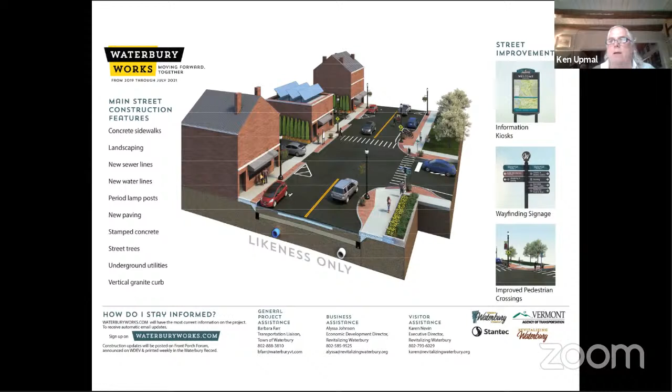There we go. So now, Liz, there was that other picture I had. Let me just... it's gonna take a moment, unless you can share it yourself, but I will look for it. Yeah, it was just gonna take a minute. Waterbury Map General. Yep, it's gonna take a minute for me to find it. Do you not have it? Can you share it? I have it. Let me see, how do I share my screen here? Just click share screen, and I'll look for it in the meantime. Okay, share screen. Yeah. Just click share screen. Yeah. Now I gotta find it. Apologies, I gotta find it. Yeah I'll look too.

How'd you ever manage a project like that with all the traffic going through town? I mean, I just can't imagine tearing up the whole street.

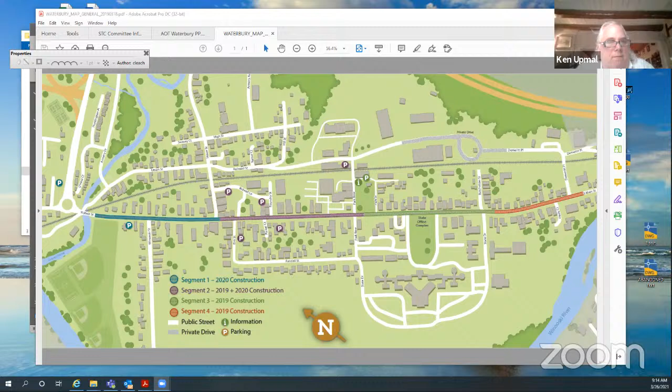Wow, there we go. Okay, so on the far left there of that illustration, you can see the circle, that's the roundabout off the interchange. Okay, and the project starts just beyond the brook, that little bridge on the right side right there, and it extends easterly, and right there you'll see it goes all the way down to a point, just past the old Bean Chevrolet place. You can see the Waterbury State Office complex loop there as such.

Got a few things. One of the challenges of this project, of course, the real challenge to these projects I've always said, is not the engineering. Engineers, we don't have a hard time doing our work with respect to the engineering, but it's always the right of way and the utility and the environmental permits. I find those to be our greatest challenges.

And just for this project, as a side note, it had 122 separate parcels. Oh my God, so it was the largest right-of-way undertaking that I've ever experienced at the agency. And so we had to meet with every one of those abutters and discuss the project with them, listen to their needs and concerns, and incorporate that. And then we had to value all those, and then we had to negotiate settlements with all those. And we did a pretty good job there because we only had one individual challenge us on minor alterations.

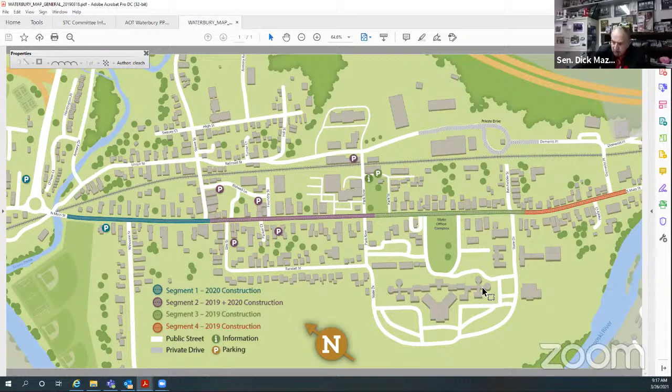Well, as I said, we have undergrounded all the utilities. We've built the infrastructure underground for all the utilities from the beginning of the project to that northern access to the state office complex. And it was eligible for federal participation, so the town only pays 2% of that.

But here was the trick, and this was one of our greatest challenges. From a constructability standpoint, you could have put all the infrastructure underground, but then it takes about 1.5 years or even more for all the utilities to run their stuff underground. We don't physically move their infrastructure from the poles to the underground utility conduits and vaults - that's their work. And of course, you'd have them tripping over the contractor, which would be a real mess. It was a real challenge.

So what we came up with after about 1.5 years of discussions was that the existing poles were in a position such that we could leave them throughout the primary reconstruction of the roadway and the sidewalks. And then we build all the underground infrastructure to host those utilities.

And now that the vaults are in, I think Green Mountain Power has moved most of their power underground, but now we have 4 or 5 other telecommunications utilities that need to move their work, and most importantly, Fairpoint, who would be the last people to move their stuff underground and then connect it and energize it all. So that's being done now as we speak.

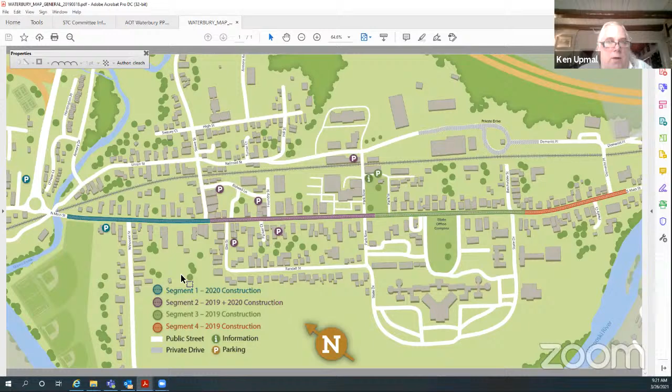And then it gets programmed and it gets deemed eligible. And that's what we've got - we've got these legacy projects that have been around in the roadway group, and we've knocked out a whole bunch of them. I've got 4 more or 5 more to complete. I'm not going to get them done in my career because I'm going to retire soon, but when they're done, the agency doesn't have a whole basket more of these to do.

There'll probably be some corridor programming. I know there's interest in certain corridors on the national highway system, but this was all done back in the 80s when they programmed this stuff, and it takes a lot of money, a lot of effort, and a lot of time. They're not something you can knock out like we do in our accelerated bridge program. The logistics of advancing a project with the utilities right of way and environmental permitting is quite a massive undertaking. Kind of makes you wonder where sometimes we get the payback on some of these projects.

It's not that the infrastructure doesn't need upgrades, and we need to modernize. But when you hear about how retail is dead and everybody wants to move out, I wonder if we keep up with the times on some of these. What was good in the 80s sometimes isn't good in the late 2000s, but it's a beautiful project, no ifs, ands, or buts. It's just a stunning project. I guess that's what it is - it keeps Vermont looking more like Vermont.

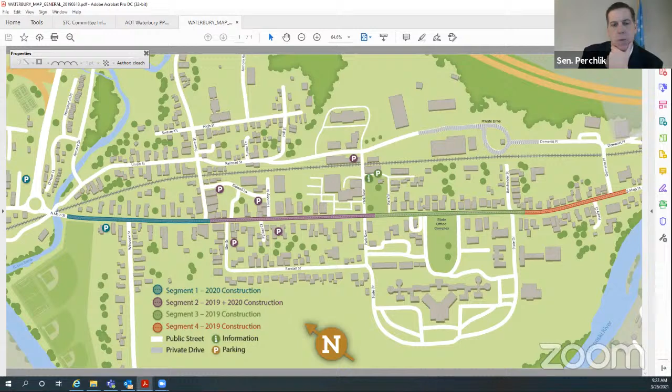No. What happens with the sewer - I work with Federal Highway Administration, and typically because of the proximity of the existing infrastructure to the bottom of excavation, if it's close enough, your construction activities will damage it, so that makes it eligible for participation. I worked with Federal Highway and got them to go along - I think we had 65% of it that was close enough. Instead of making the town pay for the other 35%, Federal Highway came in and decided to participate in the whole thing. That's an issue with a project in Plainfield on the intersection there.

Fortunately, it might create another stoplight for Senator Kitchel to go through on her way to Montpelier, but the cost of the sewer lines and water lines to the town is pretty astronomical. It seems like some of these projects get federal funding and some don't, so I'm trying to better understand when that is.

I'd have to know more of the details. All projects are different.

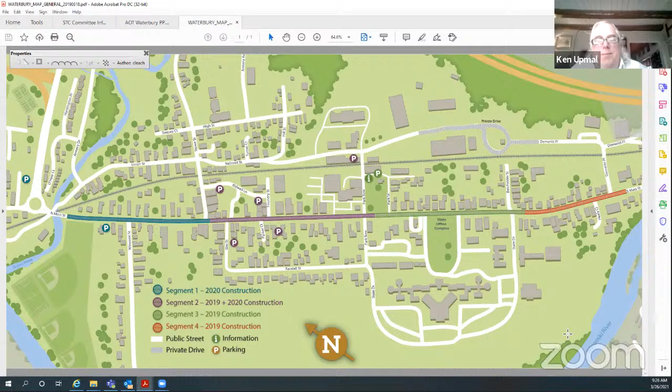One of our greatest challenges - we would have built this project a year earlier, we were ready to advertise, but we had to deal with all the development soil issues from new laws related to those. Development soils being those soils in urban municipal environments that have the potential for solid waste contamination. The soils were the town's, and it would have cost them probably millions of dollars to dispose of that soil under the new guidelines and requirements.

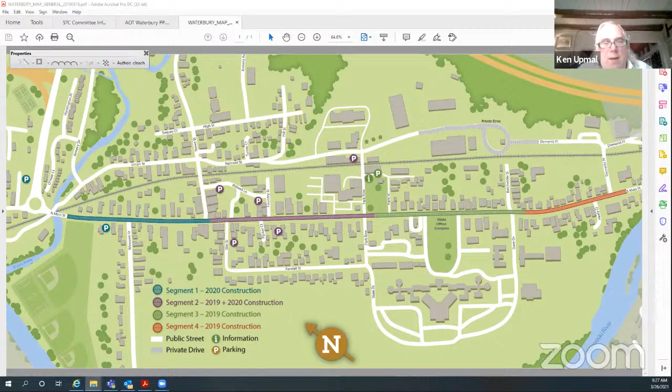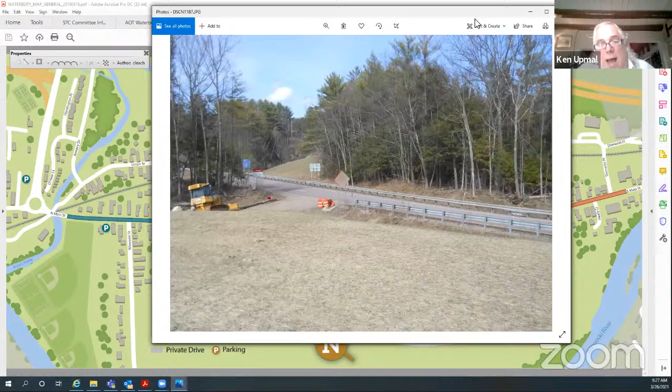So we came up with another innovative approach and bypassed the need to go through that whole process by wasting those soils within the interstate right-of-way. If you drive around Waterbury, between Burlington and Montpelier, Casey's going to show you some photographs - we placed those materials in two or three separate areas within the interstate right-of-way to accommodate those soils. The town of Waterbury didn't have $3 or $4 million to get rid of that soil, but we were allowed to put it within our right-of-way because it's not going to be developed.

So that was really interesting. Like I said, this has been a really incredible undertaking.

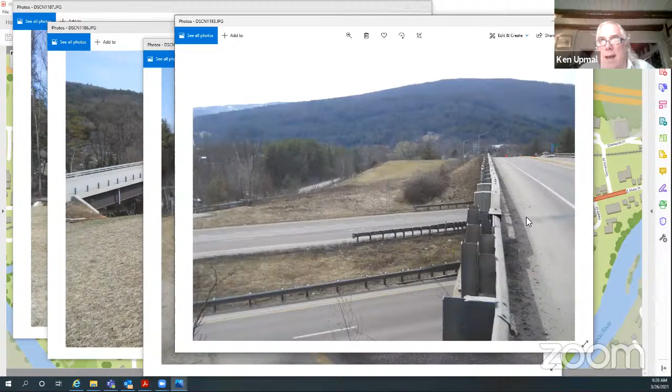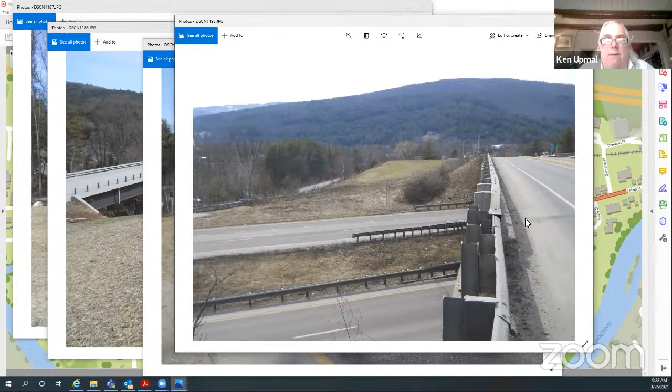I'm going to let Casey show you some photos, but before I close out, I got to give credit to people that never get much credit. There's a gentleman who works for the Agency of Transportation, Tom Mancini, the resident engineer on this job. This guy goes out there and builds a project like this day in, day out, 14-hour days. It's incredible the commitment they have. Casey Leach, who's going to speak to you, went out there and acted as assistant resident, working hundreds and hundreds of hours over 2 years. And I got to give credit to J.A. McDonald and their superintendent, Matt Moran, for dealing with the logistics of getting this project constructed - it's amazing. So I just wanted to give a little credit to those folks, because they never get much credit and they do an outstanding job.

So with that, Casey, why don't you introduce yourself and give the folks a little construction update.

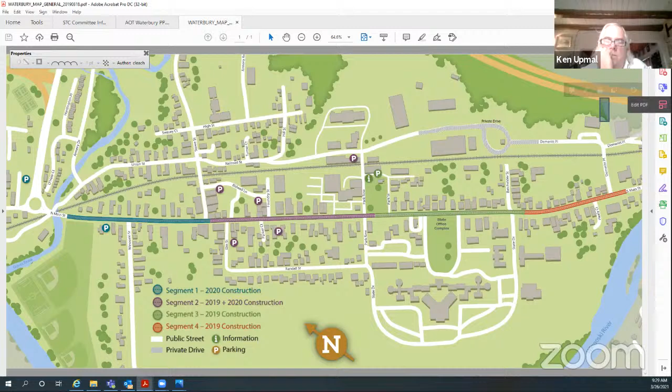Hi, Senators, thank you for having us here. So like Kenny said, I was lucky enough to work in the field for the past 2 construction seasons on this project. I worked a little bit with him and Stantec developing the final phase of the contract plans and going through the advertisement process, so luckily I was familiar with it beforehand.

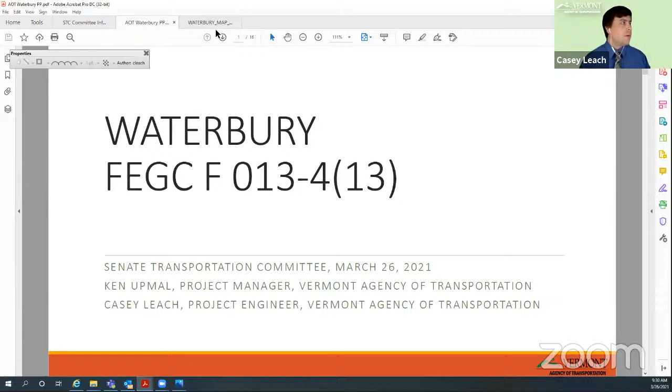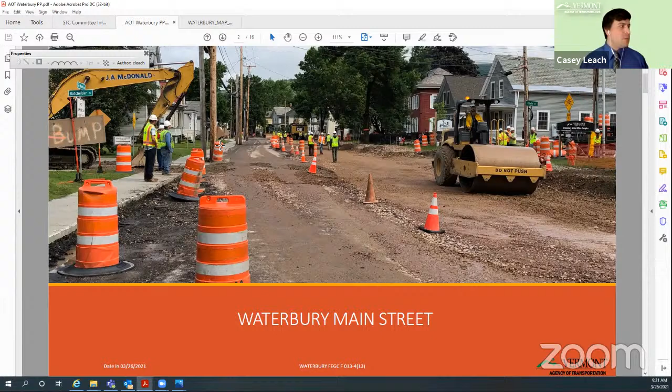Good eye there. And as Kenny mentioned before, this shows the utility poles - the older ones are still there, as well as the newer ones. In this area, these poles are staying. The lighter brown are the newer ones where most of the utilities had already switched over to, and the darker gray ones we removed when we did the reconstruction of the sidewalk through this area.

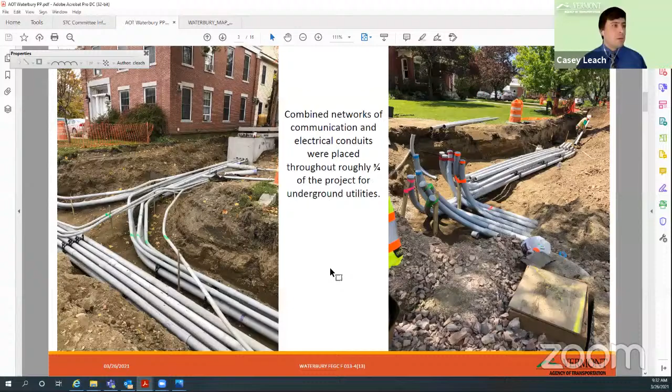Boy, talk about coordinating things. Oh my God, I can't even imagine sitting down and figuring this all out. Yeah, the conduit was probably one of the trickier things to work through, especially in areas with light pole foundations or busy intersections where there's just a bunch of stuff going on. We had to do quite a few field changes just to make everything work. But luckily, like Kenny said, McDonald was really good and on top of it. You get it all filled up and buried and you forgot to put one in - hopefully not, knock on wood. Oh my God.

Luckily, part of it is they run the strings through for the actual utilities before they progress too far. So not that it didn't happen, but luckily we caught any errors before they were in concrete.

These are just some more riser poles for the conduit. This is right where the conduit would start coming up. You can see these metal sleeves here, so these would all bend here and then come up the pole, and then they would start heading down toward Waitsfield.

You can see some of the issues we had with driveways, because we have to maintain access to driveways that only have one entry or exit point. So between digging the conduit trench, laying the conduit, and then these are all concrete encased, you have to encase them in concrete and then let the concrete set before you can backfill.

So that takes a while. Were all the businesses shut down during that time? The businesses on Main Street, were they able to stay open? They were able to stay open mostly.

If they were open, we made accommodations either with ramps or temporary walkways to make sure pedestrians could get in. Some of them that only have limited access might have changed their hours a little bit. And as terrible as COVID was, a lot of businesses had reduced activity because the state office complex wasn't really at capacity, so there was a lot of downtime with the businesses.

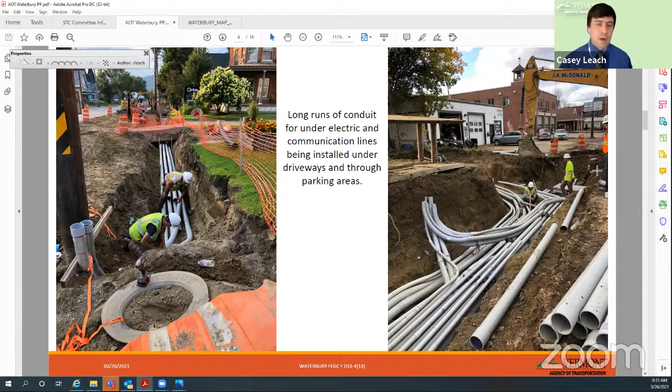People with large driveways or turnarounds like this garage here, or the fire department, were a great example, because we can't dig a large trench across the entirety of the fire department. You just have to do that in phases, so you have to phase everything out.

This was primarily what the contractor submitted for their traffic control plan. We had a lot of stipulations in our contract plans about when they could do lane closures and for how long. One stipulation was they could only do one lane closures from like 9 to 3, because we didn't want to jam up school buses or the state office complex, which is a huge generator of traffic. So during those busy times before 9 and after 3, we wanted two lanes open at all times for more free movement.

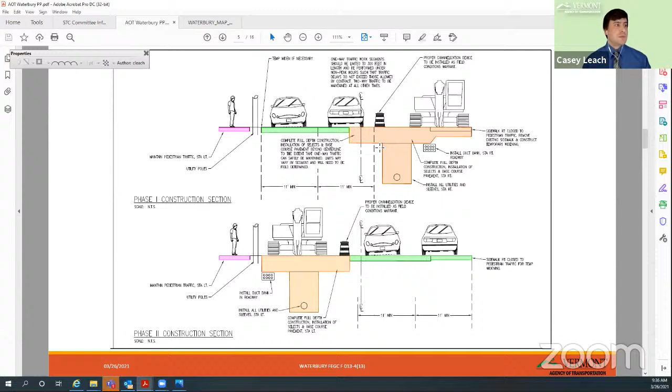The top one was primarily our sewer, on the right-hand side of the road, and the bottom one was mostly the water on the left. We maintained two-way traffic, and they could just move the barrels since we typically used barrels or movable barricades during daytime hours. If we had to, we'd put concrete barriers up at night. But the goal was to have everything backfilled by the evening, primarily by 3 p.m., so we could have two-way traffic moving freely without concrete barricades throughout the entirety of the project.

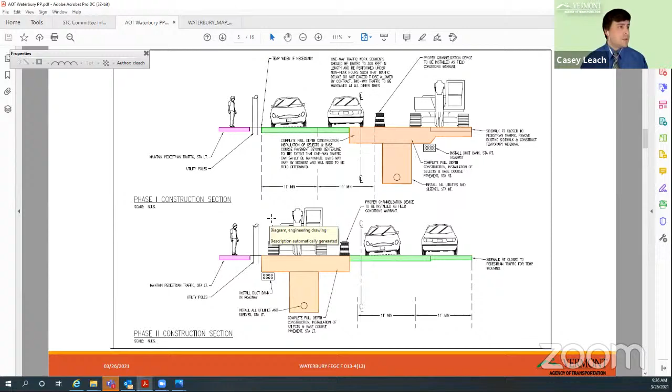These just show some innovative traffic control. When we got down toward the roundabout, luckily that work was the second year, so we were able to really get a rhythm going and know what we were doing. That's one of the reasons McDonald planned their traffic control and work sequencing that way - they didn't want to start in what they called phase 1 or 2, primarily the downtown corridor, because it would be so busy.

With the roundabout, we did require a separate traffic control plan. They had flaggers on every leg to prevent gridlock from happening.

The picture on the left is just a water line install - this is the new water main going in. You can see traffic moving on an alternating one-way basis, and this van is actually part of the live lane of traffic. The dump trucks would park next to the trench to take all the backfill and bring it back when filling the trench, and of course the equipment is above the water line.

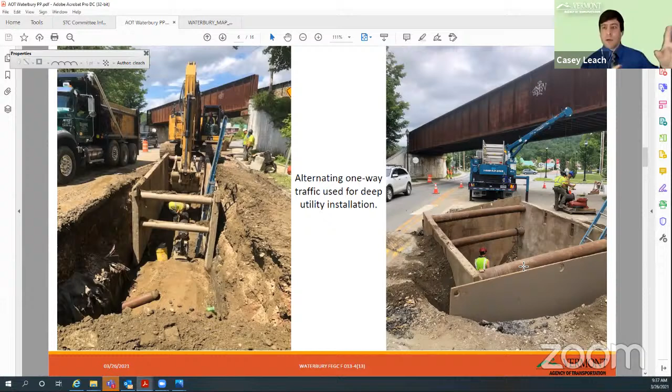The one on the right is a live tap. When we got to the live water main we were tying into on both ends of the project, and some of the intersections, they used live taps so we didn't have to shut down large portions of the water system for an entire day.

These really show the proximity of what we were doing to these businesses. This is a really deep sewer install, and we were right at the entrance of VSECU, Northfield Savings Bank, and Prohibition Pig is right on this side as well. VSECU did close down temporarily for a few days, because you can see it's very difficult to get people in and out of there safely.

We were lucky enough to have separate entrances down on this left-hand picture. McGillicuddy's had a second door here, and this walkway goes to a stairway that empties out onto Elm Street, so we were able to maintain traffic through there. We also used pedestrian flaggers - this is one of them right here. Their job was to move pedestrians throughout the work zone. They would be in hard hats and safety vests with all the safety precautions, keeping watch.

Casey, is the light still there where Stowe Street comes onto Main Street? This light? Yes, the new lights are in, so there's a new traffic signal there. Oh okay, so that's still lighted. It's still a signalized intersection. They don't have the span wires anymore - it's their actual mast poles now, so they look a lot better, I think. But yes, this one is still signalized, and down at the next intersection too, not Elm Street, not Randall Street either, by the state office complex - that one is still signalized as well, a 4-way signalized intersection.

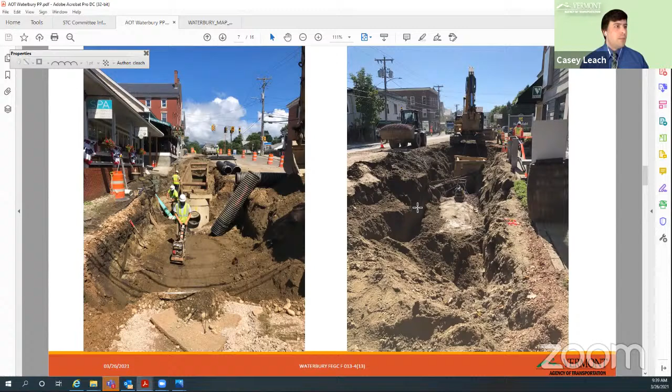I should tell the committee I worked at the state complex from 1978 to 2002, so I spent a lot of time in downtown Waterbury. Must have been 12 years old then. Wow, I must have been, but let me tell you, the village of Waterbury compared to the late 70s is just a beautiful village now, and the houses are in much better condition, and the commercial district too. It's been an interesting evolution to see, but that's a lot of time - and that was back when the complex was not what it is today. So it's pretty transformative.

We did do a lot of work very close to buildings. As you can see here, this is the funeral home right on Foundry Street. We're doing a water investigation right at McGillicuddy's - we had a leak somewhere, so they were receiving water in their basement, and we were trying to figure out if it was an old corporation stop. Typically what the town would do when they switched services was just crimp the copper - they wouldn't necessarily shut off the corporation because then you'd have to dig to the main. There were a lot of interesting live water services that were unknown when we were digging, which made it interesting. But they actually had customers here eating out there, and they were very fascinated with the work we were doing.

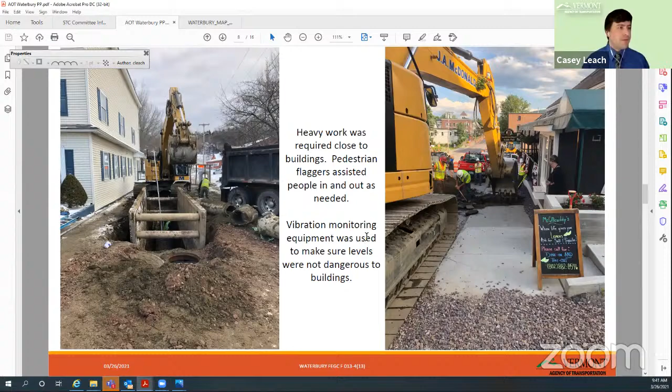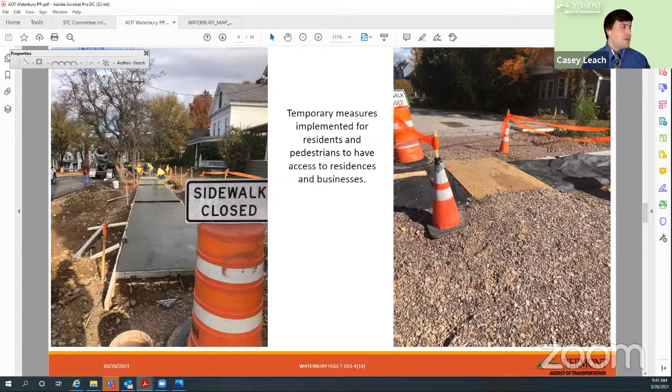These are some of the ramps we kept so people could access their driveways - obviously it was just a walk-on, and they had to park either at their neighbors' or over at the town office complex. We worked with the town really closely, having meetings with them every week with our public information officer and the town public works director, so they worked very well to get the word out and let people know when we would be impacting their driveways or water service. Especially for the driveways, it was a great sense of community, because they would let their neighbors park with them, or work out systems like that between themselves, which worked really well.

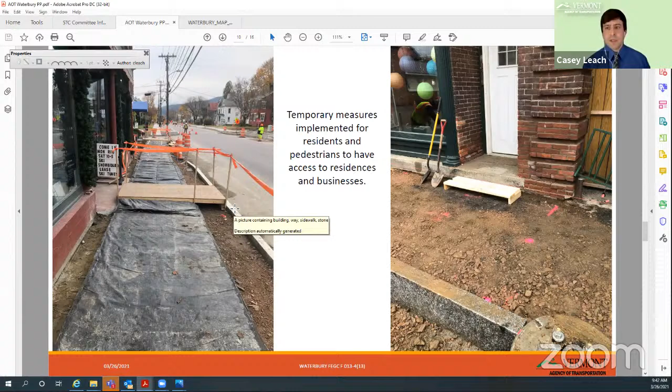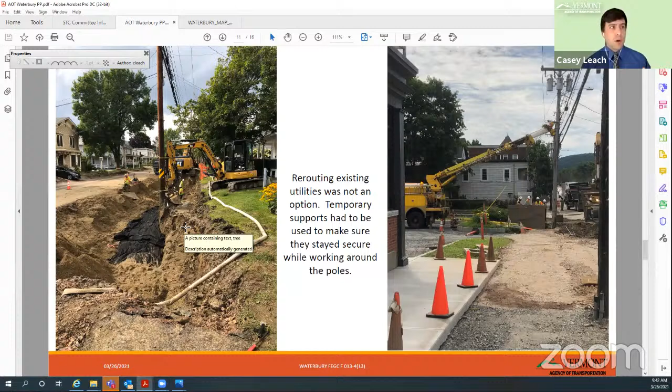These are some of the new utility poles that were still kind of in the way. As Kenny said, we couldn't really relocate them since they're newer, so we just had an item in the contract for bracing them. That was either with excavators, as you can see in the picture on the left, used a lot to make sure they wouldn't wiggle around too much during excavation. In the picture on the right, you can see GMP - for the more robust poles with much more on them - would come and hold them themselves, just to make sure there wouldn't be any issues.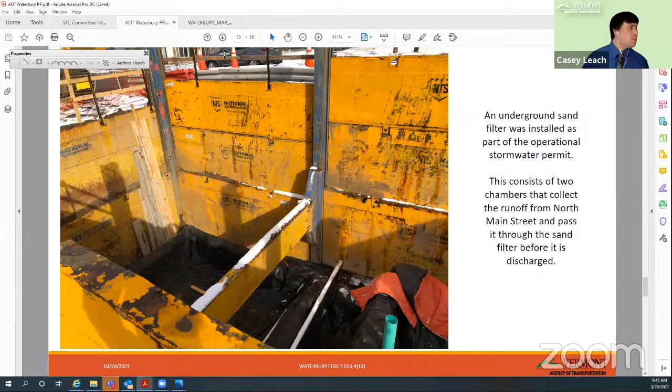You can see some cars up here for scale, and then there's a guy standing down there who's roughly 6 feet tall. So it was very deep down into the ground.

And then with all the underground, there's a lot of unknowns. The center picture is a drainage structure that they found right across from the town office building. It took them about 45 minutes to dig it out of the ground. We didn't know it was there. And the concrete was actually too hard, they couldn't break it with an excavator, so they had to dig all the way around it and take it out full, which was pretty interesting.

We do find a lot of pipes that we're not really sure what they're coming from. We try to figure out what they are, if they're still active, and then we would tie them into drainage structures as needed. And then the photo on the right just kind of shows an active water main.

This was right at the end of the project. The town had told us it had been shut off years ago, so we started to remove it, and the valves weren't turned completely, and then it just kind of erupted. This was actually one of the last days that we were working with the water, which was very interesting because the town didn't exactly know which valves to shut off to make it stop.

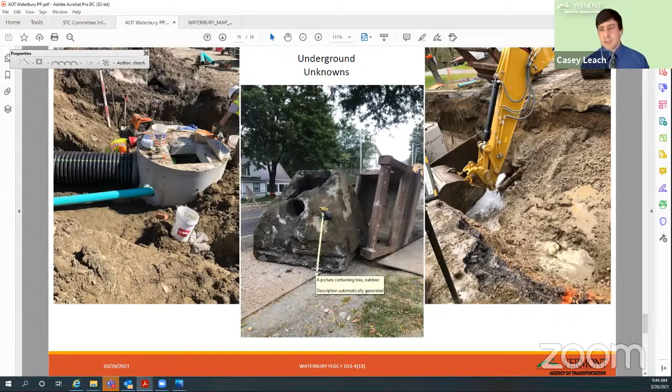There was actually an old valve that they had kind of forgotten about that was off all of the latest plans, tucked away behind a building. But luckily they found it and shut the water off. It made us well aware that we really need to know where valves are and make sure that they're accessible at all times when you're digging so close to live utilities.

And that is all that I have.

Where's the sewage disposal plant in Waterbury? Where is it, way on the other end? There's, I believe it's right by the roundabout. Oh, that's where it is. It's not too far from the roundabout. Yeah, there's a couple of pump stations in between too.

I know there's a pump station down by the hockey rink, but all the sewer that we were dealing with was gravity, and it goes down Elm Street and then goes kind of behind the houses toward the roundabout. Questions this morning?

Great project. Wow, really, some project to do right downtown, and you to get 122 people to work with you, all the homeowners, and that must have been a challenge right there, because I'm sure you had to dig up a lot of front yards and convince them that it was the right thing to do.

Man, yes, go ahead, Senator Perchlik. I should know the answer to this, but all the granite curbing we see, like there's some in this project and a lot of projects we see that. Is it a dumb question to ask if it's all coming from Barre, or is it because there was another granite project and I found out that it's cheaper to import it than it is to get it, but I wondered if the curbing is something we're still getting locally.

I don't think that's a dumb question at all, because that's kind of what I had figured before I started working with these projects. I don't want to be wrong with this, but I'm 99% sure it does not come from Barre. I believe that there's a different type that they do, or they don't manufacture that type of curbing, or I think there's kind of a logistics reason why, not just that it's cheaper, because they're going to go with the cheapest option, obviously. But I think, and I could be wrong, Barre kind of produces something different than what they need for the curbing.

Okay, the next project this morning is going to be the Rockingham Bridge. Carolyn Cota is believed with us this morning, for the design, build, and construction project. Is Carolyn with us this morning?

I'm here. Good morning. How are you? Good morning. And I have David Peterson with me as well. Okay, go right ahead. It's all yours. Tell us a little about yourself and what's happening.

Carolyn Cota. I am a senior project manager in the structure section. And David Peterson, you can say something about yourself, Dave. I am a lead engineer in the structure section also. Thank you. Great. So I have a presentation to share. I'm going to try. Let's see how it pans out here.

Can you see a picture with a couple bridges? Wow, I guess so. Okay, good, great. So we're good to go. Good to go. Thank you for having us. This is the Rockingham IMO

091-1-66 bridges on I-91. This is what those bridges looked like originally. You will see a few pictures that will show this truss here, but for the most part, they're gone. So we expect the completion of this project in September of 2021.

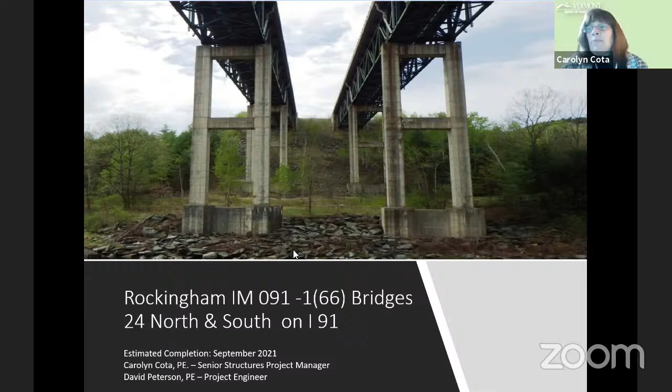Quick project summary. This project is a design build project. We expect to spend about $55 million, which actually includes the design engineering, the construction costs, and all of our construction engineering costs as well.

Construction began March of 2017, and that included putting a crossover to maintain traffic. In August of 2017, they started demolishing the Northbound Bridge, and the Northbound Bridge was completed and opened to two-way traffic in June of 2019. The demolition of the Southbound Bridge started immediately after. The Southbound Bridge is nearing completion, and we expect that both the Southbound and the Northbound Bridge will be open to two-way traffic in July of this year. All work, bringing everything back to the way it was somewhat, as far as the ground is concerned, is to be completed in September of this year.

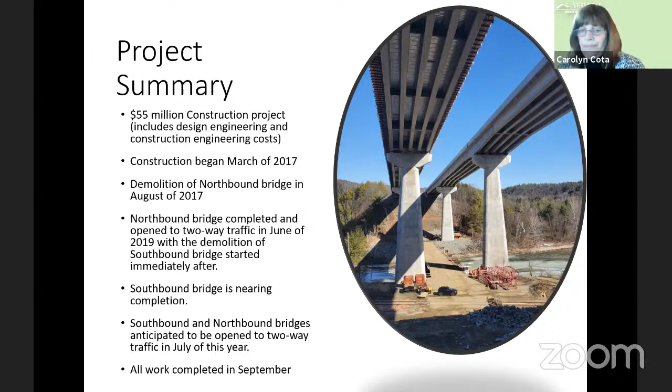Wow. All right. Thank you, Carolyn. You're welcome. So, as Carolyn mentioned, David Peterson - I have been part of the VTrans review team for this project since 2015 during the initial scoping and everything. So I've been involved with it for a while.

So, you know, before you build the bridge, you got to take the old one down. So that involves demolition. The contractor proposes a method for taking it down, and due to the height of this bridge, upwards of 100 feet plus, and the proximity of the two bridges together, also working over a railroad and the river, you can imagine it's a pretty difficult demolition process.

Did you build a new bridge and then tear this one down, or did you have to replace it on the same footprint? They were replaced on the same footprint. Because we had two side-by-side bridges, we were able to shift all the traffic onto one, tear one down, and build the new one right back in place. So you didn't have to change the road construction on either end. No, it was nice in that way. You have the two independent structures, and you can kind of phase the construction.

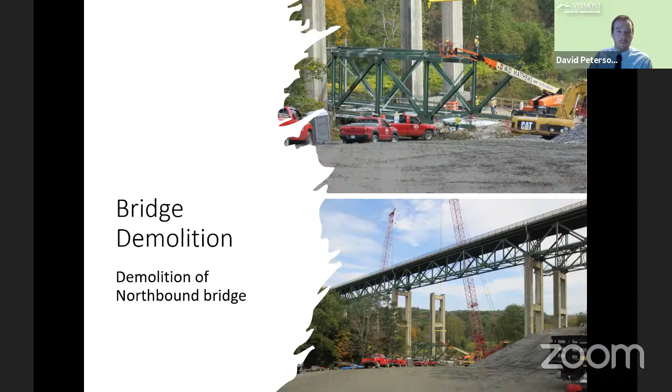So you can go to the next slide, Carolyn. I'm trying. There we go. So here we see the deck has been removed. You have the deck truss.

This type of structure was built during the interstate era, and it's non-redundant, meaning if there's one failure in one piece, it can cause a catastrophic failure. That's partially the reason we want to get these off our system. It also makes demolition more difficult, kind of like a card pyramid where you have to take the correct cards down first. You don't want to just pull one from the bottom, otherwise it's all going to come down.

So they took the truss off, and then they had these really tall piers that they had to take down. What they did was use some small demolitions at the bottom of the piers to weaken them, and then they slowly pulled them over. It was pretty cool seeing that - you see these little explosions go, and then they have an excavator attached to a wire, and they would slowly pull these things down.

One of the other big issues was lead paint and containment of that. The contractor had to propose a containment plan, and also any mitigation they would need to do if there was lead paint that fell down on the ground below. Environmentally, they needed to capture all that lead and dispose of it properly. So that was also another piece to their demolition process.

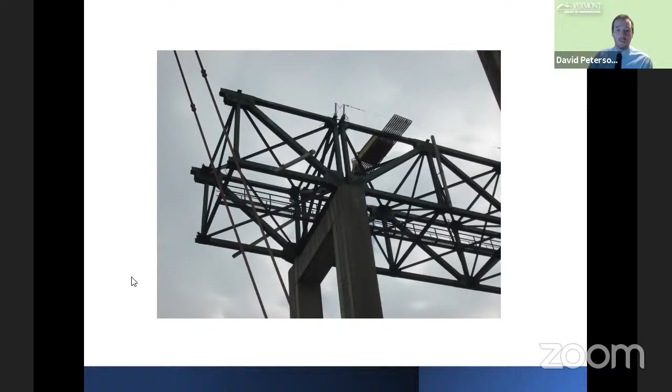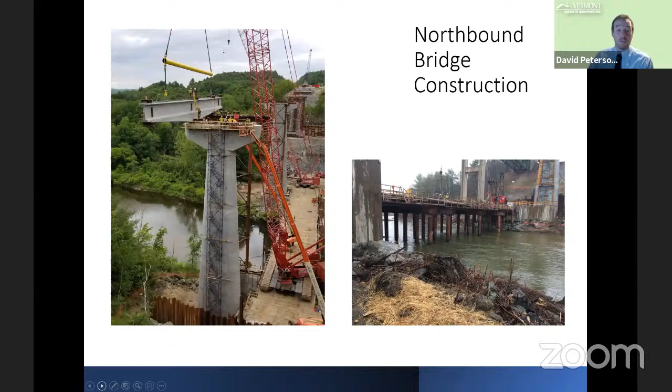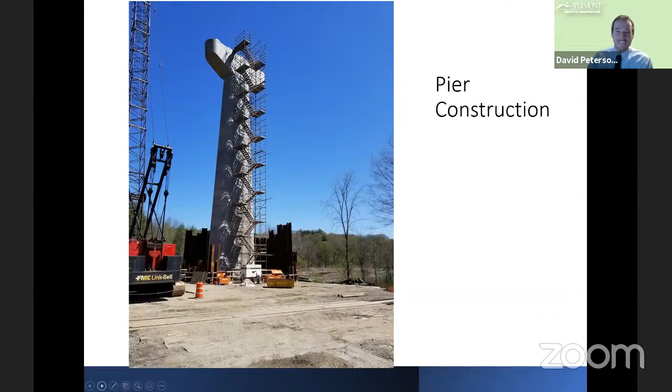Who was the contractor on this one? The contractor was Reed and Reed out of Maine. They've done some work in Vermont before, not a whole lot, so it was kind of a specialty. You've got to really understand this kind of work. They're a pretty good sized contractor, they've done some even larger bridges in Maine, including one crossing from Maine to New Hampshire that they did recently.

Not knowing the process, I can just imagine getting all those piers in there and you're off by about 3 inches. What do you do then? Yeah, that's not good.

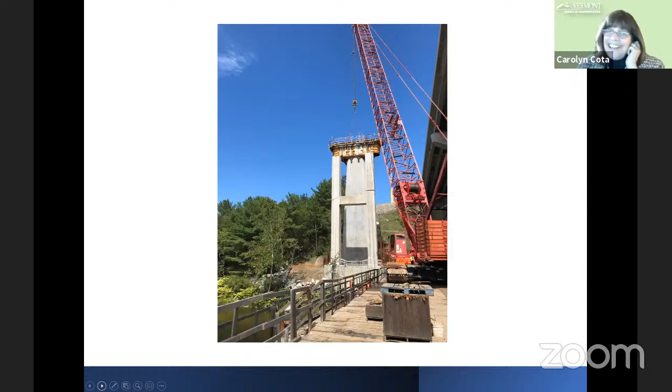Is one of my constituents, Troy Schumacher, on that job? Yes he is. He was working on the VTrans inspection side, heavily involved in making sure the contractor was building stuff meeting our specifications and plan requirements. I worked with Troy quite a bit, he's a good guy. I've seen a lot of pictures on this job as he was going through, he was pretty proud of it. Something to be proud of, that's huge.

This is a project that Dave should be really proud about, he's been on it since 2015. When you go back and look at the day-to-day function, it's beyond what myself or others can even imagine, because it all has to be coordinated with everything else.

And you're dealing with piers into the water, and there's got to be enough depth in those to hold them up. They have to go down a long ways into the ground, right? They do, down to bedrock. Some of them are on piles, but they're all founded on bedrock, either poured directly on the bedrock or with steel piles, 40 plus piles, steel beams pounded into the ground to support it. But everything's on bedrock, which makes for a really stable foundation.

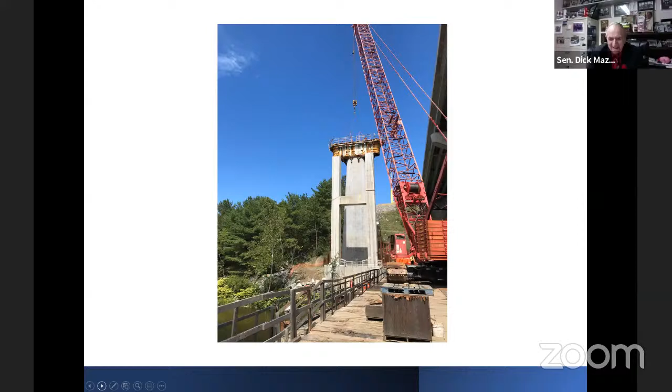Unbelievable. I would think the first thing would have to be getting over your fear of heights. Yeah, I wouldn't do it either, my knees would be knocked in, I'd be locked right up. I get nervous going to the second story of my house.

This one was close to just under 200,000 pounds, and it's about 10 feet tall. Carrara said it's one of the heaviest pieces they can physically handle at their site. I can imagine the traffic from Middlebury there, that's quite a feat in itself. And that's concrete? Yes, concrete. There were 70 pieces varying from 96 feet to almost 150 feet.

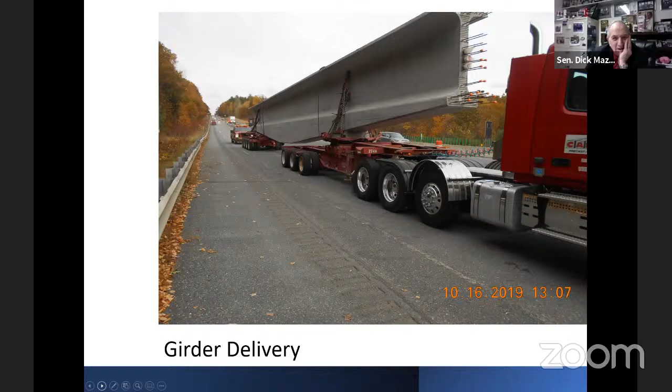The bridge itself is 863 feet long, divided up between those piers. It took about 6 weeks to set all the beams for the Northbound Bridge. The Southbound Bridge took a little longer because they did a lot of that work over the winter, so it ended up taking 10 weeks or so, but still precast is usually a pretty quick process.

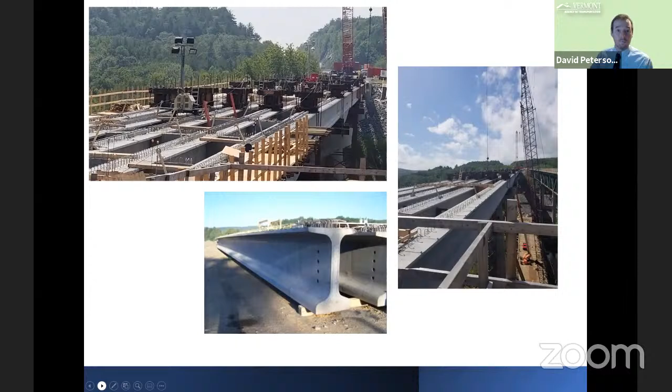Do you ever get into these projects and, when you're taking down the old structure, say, man, that was done too soon? Do you see some things that say, whoa, this was a good decision to do this now?

There's definitely that all the time. Our inspectors really can't see every little crack, and inspecting bridges like that, it's almost impossible to see every issue with it. In demo, you think you cut something that's stable and it kind of gives way, and you're like, oh, that's not a good thing.

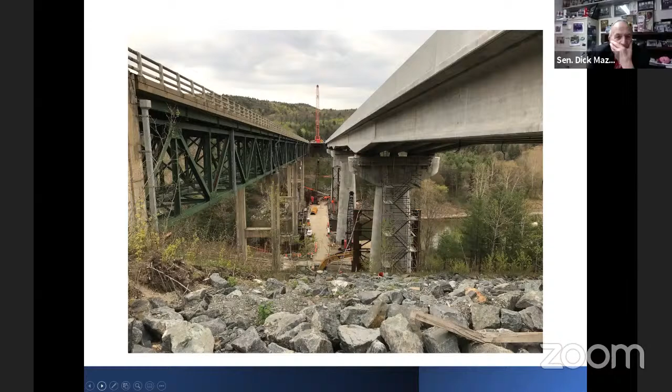So I'm going to talk a little bit about the Southbound Bridge construction. I like this picture - they actually started it in the fall, finishing up their construction of the piers. The project's been a little bit slow at times, but they've been trying to really speed it all up. You can see the underside of the Northbound Bridge and those girders there.

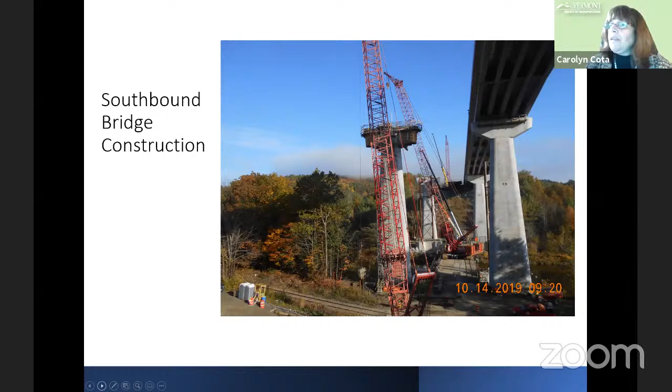Here's another view I kind of like with the new bridge. On the Northbound Bridge, you have southbound traffic and northbound traffic both going on it, and there's barrier in there to separate the traffic.

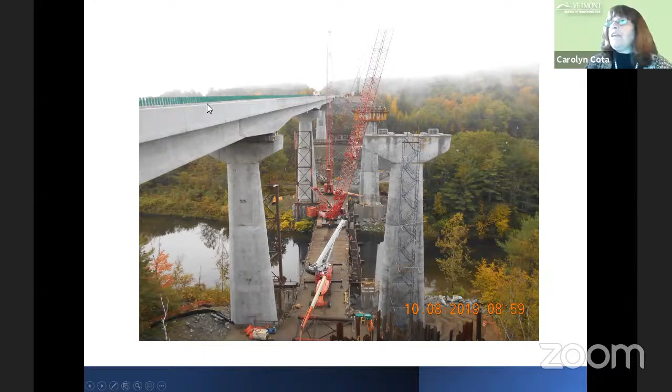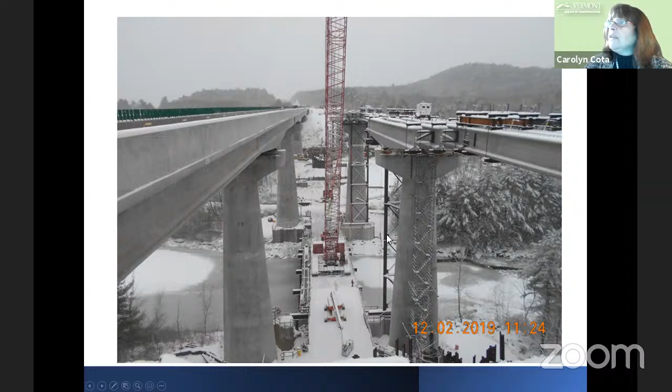We do a lot of this work in the wintertime. Here on the southbound bridge, they're installing all those very deep concrete girders, lots of snow, typical of winter. They had all of the girders in place probably January, February of 2020. Their goal was as soon as spring came, they were going to start forming up the deck, but then COVID happened, which delayed their start a little bit.

Do both bridges have to be exactly the same height, or can they be different? Or are they both the same?

Dave, I believe they're both the same grade, though there's some varying grade just based on the roadway approaches. So it doesn't have to be exactly like the other one, it's made for that lane. Right, they could be different. It could have been that both of those original bridges had even a 5-foot height differential. We still would have tried to go with the same type of bridge in both northbound and southbound.

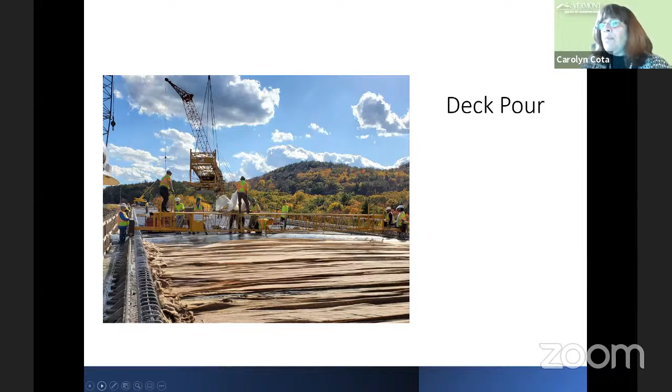What's the state's portion of the 55 million? Is it mostly federal money? It's 90% federal, 10% state. Thank you.

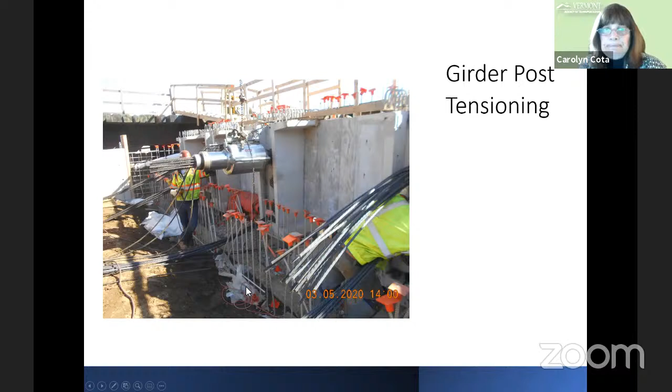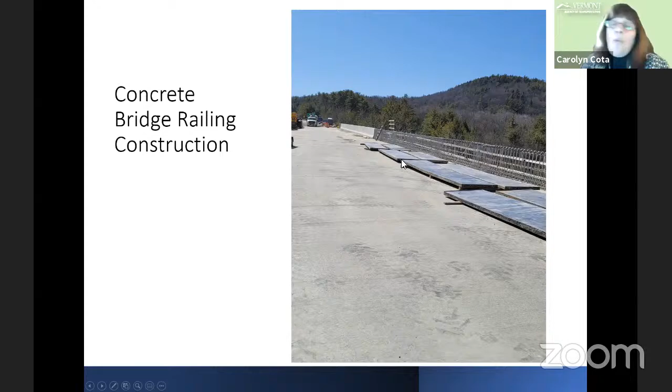Can I ask a question? Sure, Jen. You're using concrete, but in the past it was metal, I believe. So from a longevity perspective, I would assume concrete is now being used because it has a longer lifespan, or are there other reasons for using this approach?

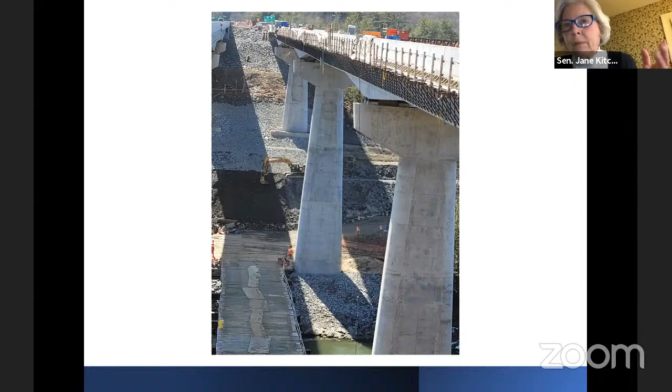All of our bridge railing now has to meet certain test levels based on the amount of traffic on the bridge, and maybe the height over the river. In this particular instance, as we continue to replace our interstate bridges, you're going to see more concrete type railing, which is called the F-shape, or that's a test level 5, I believe. It's designed to withstand the impact of trucks and cars at certain angles, and it's more durable than the steel bridge railing that was in place here 50 years ago. We've replaced a lot of our bridge railing on the interstate from what was originally installed when the interstate was first built, to make sure we have railing that will stop a car from coming over it into the river. So this is the strongest railing we have, at test level 5.

As you drive the interstates, 91 and 89, you're going to see more and more of this in place. In Colchester, when they did the bridges there a couple summers ago, I believe it was the Colchester project in 2019, those have the concrete railing as well, so you'll see more of that. That's a really good question, Senator Kitchell, because if you go to other states on the interstate, you'll see a lot more concrete railing too, compared to when we were driving around back in the 70s.

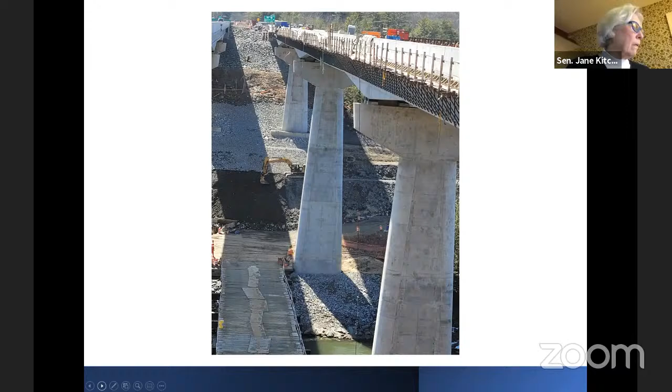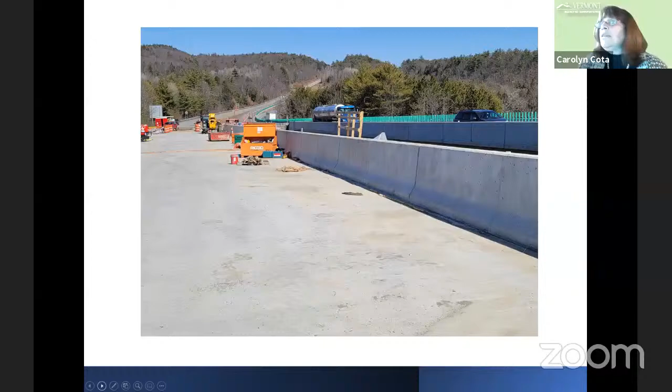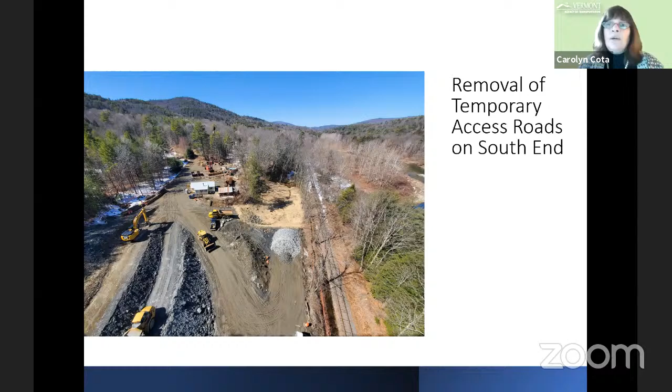And here's another picture. It's getting there. Unbelievable. Good. Wow.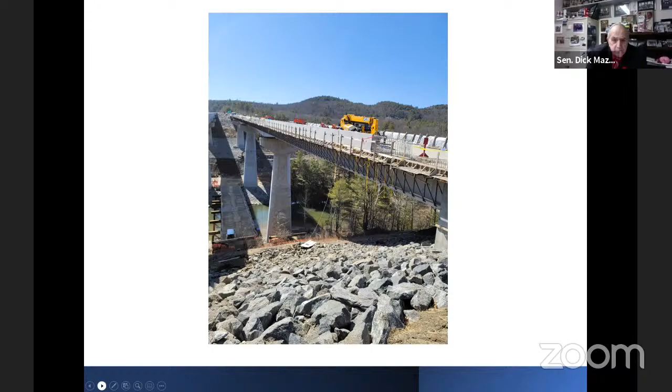And this is an awesome picture. What's really exciting about this picture is that it's a depiction of what it's going to look like when everything's said and done. But what's really exciting is that this project won the 2021 Precast Pre-Stressed Concrete Institute Award for transportation, best bridge with a main span more than 150 feet.

Anytime, I always find it exciting, Vermont being such a small state, a lot of our bridges are not as magnificent as the ones you might see in Florida or Minnesota. And when we win an award, I think it's just awesome.

They should put your picture, yours and David's picture on there, you know? Which picture? Both of your pictures.

So I just wanted to show you, I don't know if you guys have the PDF, but there's a link.

Wow, that's beautiful. That will go to the actual article. Carrera is the one that put this project in for an award.

And I just find that there were some facts, like, wasn't there an award also for the bridge in Brattleboro? It seems like there was. I remember we got, I think, a YouTube or some article that sort of outlined that project, and it's hard to remember everything, but I thought that was also a Vermont project that received an award.